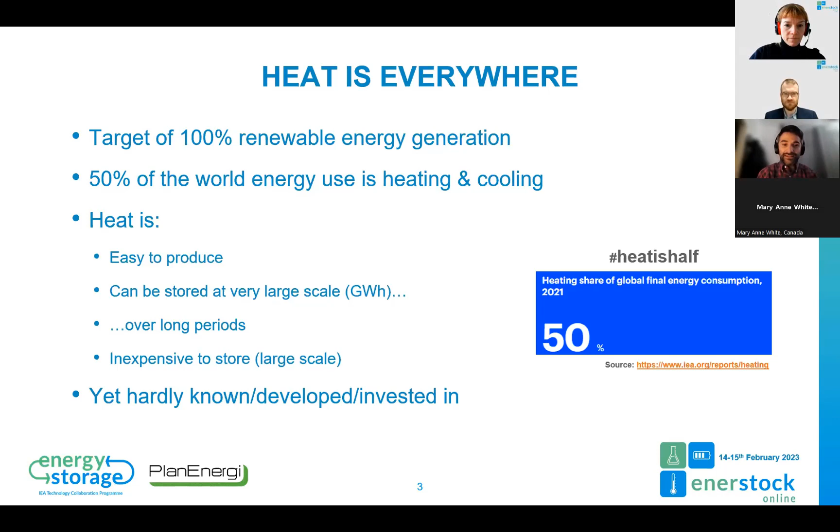Heat is also easy to produce. It can be stored at very large scale, so we're talking about gigawatt hours over long periods. Seasonal storage is something that actually works, and it's quite inexpensive at large scale. And yet it's hardly known, developed, or invested in.

So to give more arguments, I'm saying that heat is inexpensive to store, but how inexpensive? Well, it's from €4 per kilowatt hour to less than €1 per kilowatt hour at large scale. If we compare this with pumped hydro storage, it's between 100 and €200 per kilowatt hour in good cases, and on average 175.

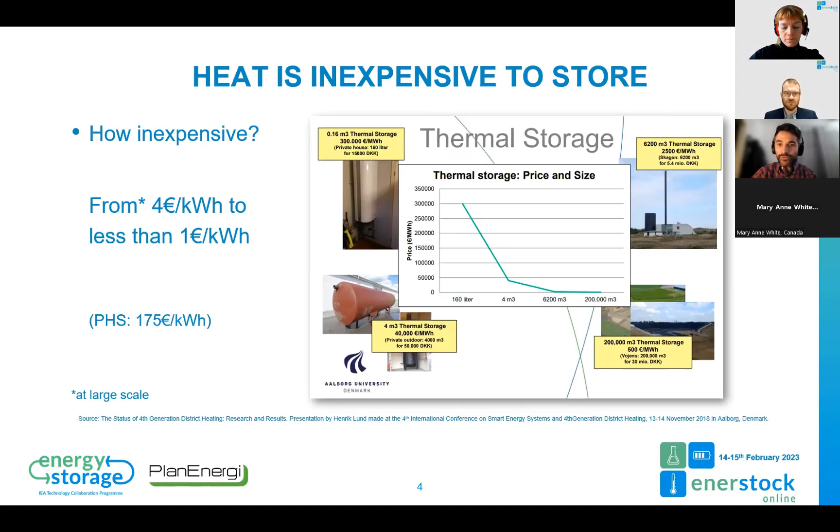So you can see the difference in investment costs here, and the bigger the better. As you can see on this curve, when you have household thermal energy storage, it's quite expensive in specific price. But then when you go up to a very large scale, it's very inexpensive.

Now, thermal storage enables renewables. It provides more flexibility in district heating systems. It helps reaching a higher share of renewables such as solar.

So on the right-hand side here, I'm not sure if you can see my cursor... No, I cannot see. But anyway, on the right-hand side, you can see that we can store heat in the summer where there is low heat demand, and then reuse this later on during the year.

It can be used also for peak shaving, power to heat, such as sector coupling, and a large variation of operational conditions. So it can be used for short-term, long-term, and middle to large district heating systems.

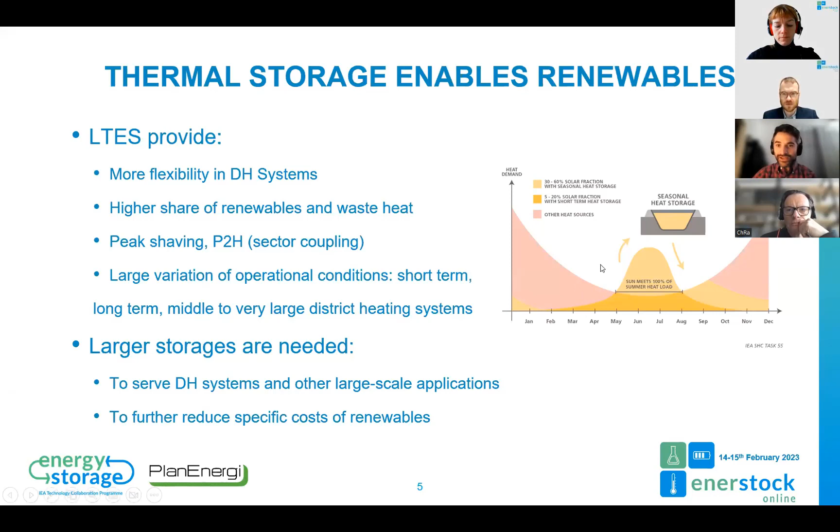Now, larger storages are needed to serve district heating systems and other large-scale applications, but also to reduce the specific costs of renewables. If you want to reach higher targets of renewables, then having a storage is indispensable.

Now, why is thermal storage less known? I'm giving a lot of advantages here, but it's less invested in, it's less a hot topic. Well, first of all, it's often coupled to district heating or big infrastructure, so the public is not really aware of it. It's more industrials and big district heating networks that have to use thermal storage.

It's a local solution. So unlike electricity storage, it doesn't go through borders. It usually is at city level. There are less use cases. The cheap fossil fuels have made it possible to implement district heating systems without having the need for storage, because energy production was cheap.

But today we can see that this is no longer the case. And the last point is that it's less high-tech, so it's less of a hot topic. It's maybe less sexy, but I think we'll have to disagree on this one. This is a tank thermal energy storage, and I think it's very sexy.

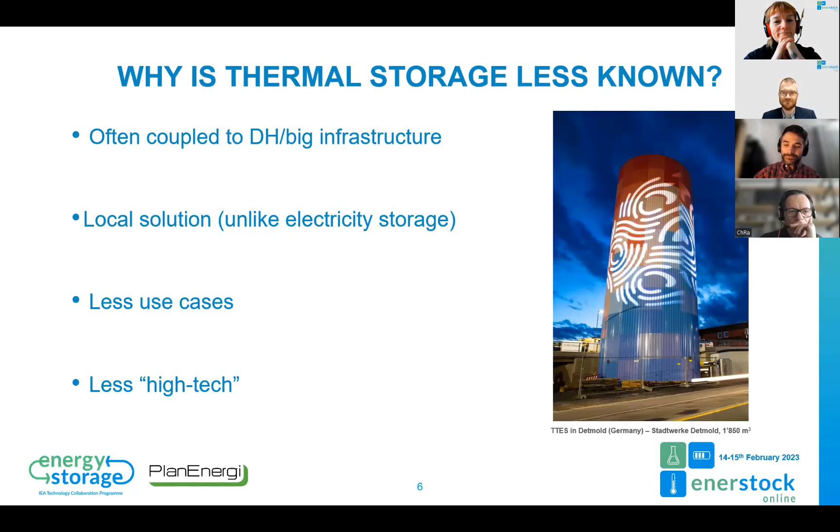Now, the focus, when I say large thermal energy storages, in this task, is on 4 different technologies: tank thermal energy storages, pit thermal energy storages, boreholes, and aquifer thermal energy storages. They can be above ground for the tanks, but also underground. And the heat transfer medium is water or soil.

The volumes are more than 10,000 cubic meters. And the applications are variable. It can be daily, weekly, or seasonal storage for district heating and industries.

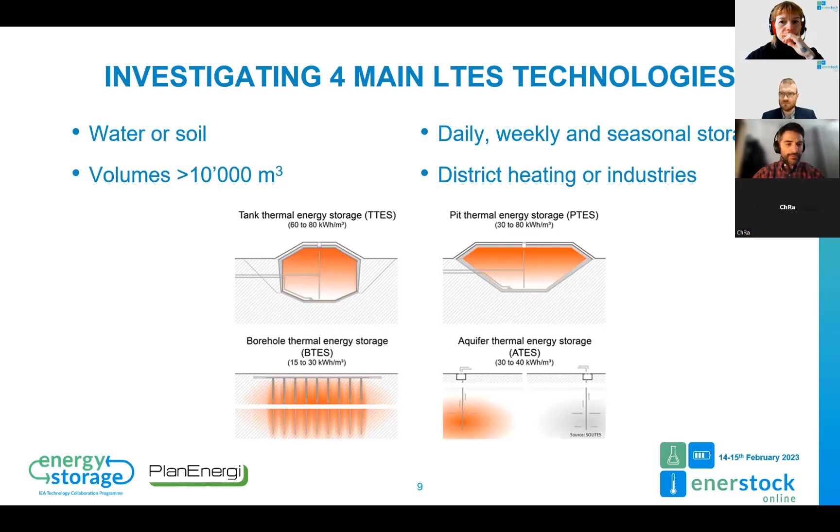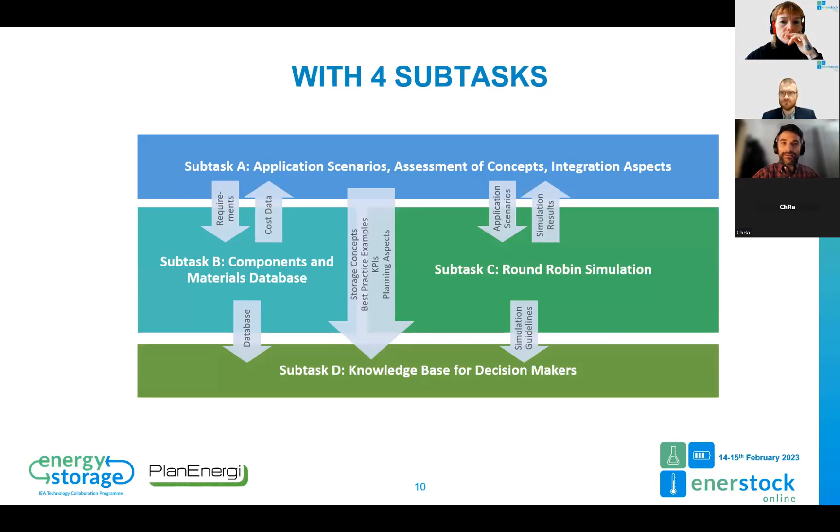Within IEA Task 39, we have 4 subtasks, and it's almost perfectly alphabetic. Subtask A is for application scenarios and concepts. In this subtask, we make a list of projects, list of KPIs, use cases, typical implementation procedure, and techno-economic analysis.

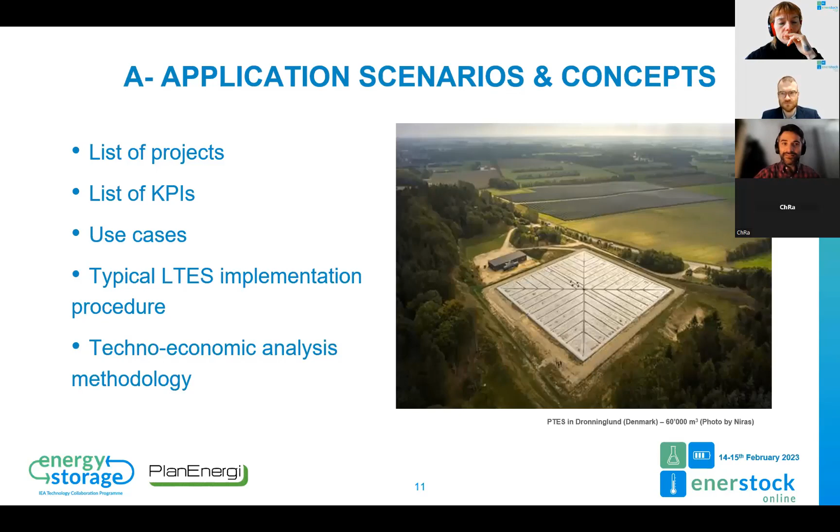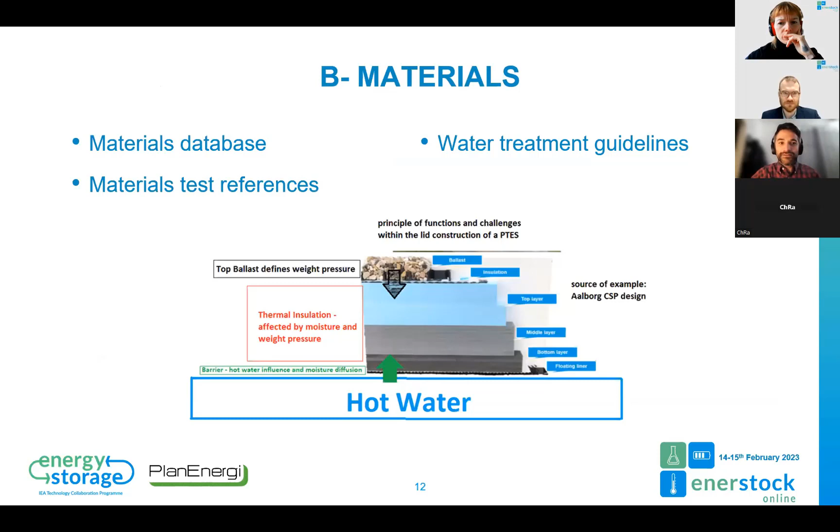Subtask B, that's where the alphabetic sense goes a bit off. It's for materials database, test references, and also water treatment guidelines.

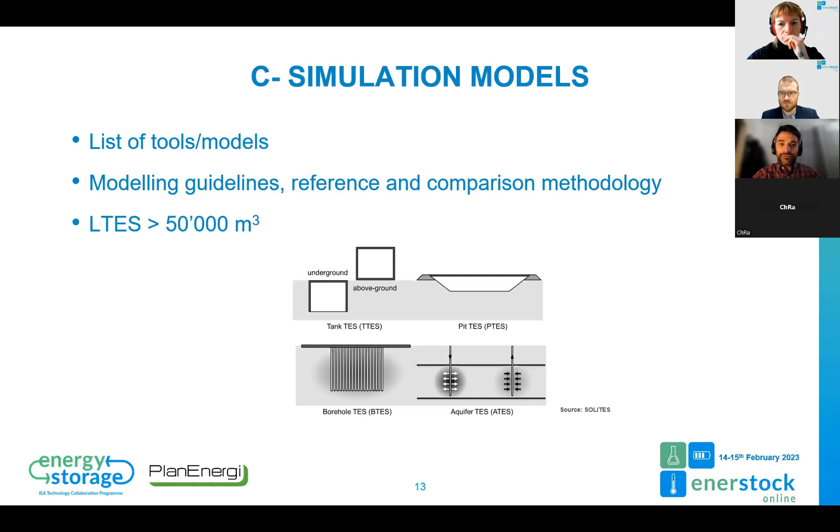Now, C is for simulation models. It's a list of tools and models that will come out of this. It's modeling guidelines and reference as an outcome for this task, and it's for large thermal energy storages for more than 50,000 cubic meters.

As I mentioned earlier, I'm responsible for subtask D, and our idea is to develop tools, references, and methods to guide large thermal energy storage project stakeholders through the process of implementation. In implementation, there are 4 essential phases where we have identified 3 target groups.

The first target group is policymakers. The second target group is researchers and engineers. And the last target group is project developers.

And a typical large thermal energy storage project takes place in 4 phases. The first one is the opportunity phase, and we'll have deliverables for that phase, which is project examples, business cases, and a list of KPIs.

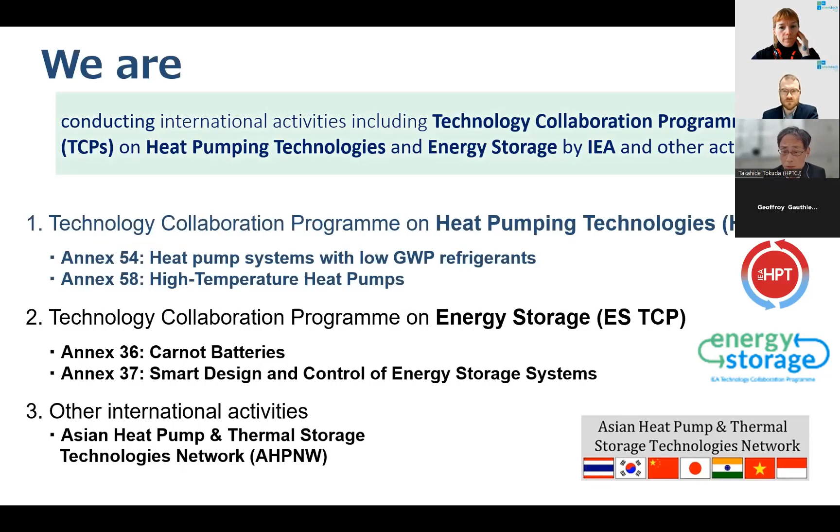Now I would like to present the country report of Japan. This is what my predecessor, Mr. Takayoshi Shuto, presented at the 93rd Executive Committee meeting, XC93, in Rome last May. First, this is about overview.

Geographically, Japan is an island nation consisting of 6,852 islands of various sizes. The total area is about 378,000 square kilometers, which is close to Germany. But most of the land is mountainous. There are 108 volcanoes, and 7% of the world's active volcanoes are in Japan.

The population is 125 million, but it is gradually reducing due to declining birth rate. Since the land area is long from north to south, the climate varies from subarctic to subtropical. In many areas, summers are hot and humid. Winters are snowy in northern and mountain areas.

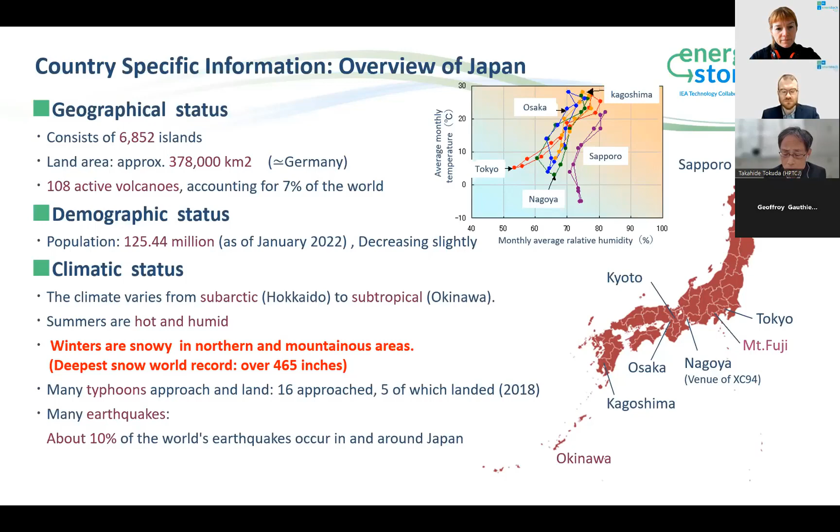The Guinness World Record for deepest snow is also recorded at Mount Ibuki, Japan. As natural disasters, many large typhoons have landed in recent years. There are many earthquakes, and it is said that about 10% of the world's earthquakes occur in and around Japan.

This is energy status. The left figure shows the primary energy supply trends in Japan. Although the share of oil is decreasing, Japan still relies on fossil fuels for more than 80% of its energy needs. Renewable energy accounts for approximately 10%, with solar and hydropower making up the majority. The percentage of nuclear power has remained low since 2011.

The right figure is the percentage of final energy consumption by sector. The industrial sector still accounts for a large share, but its growth is being controlled by strict regulations and efforts of energy conservation.

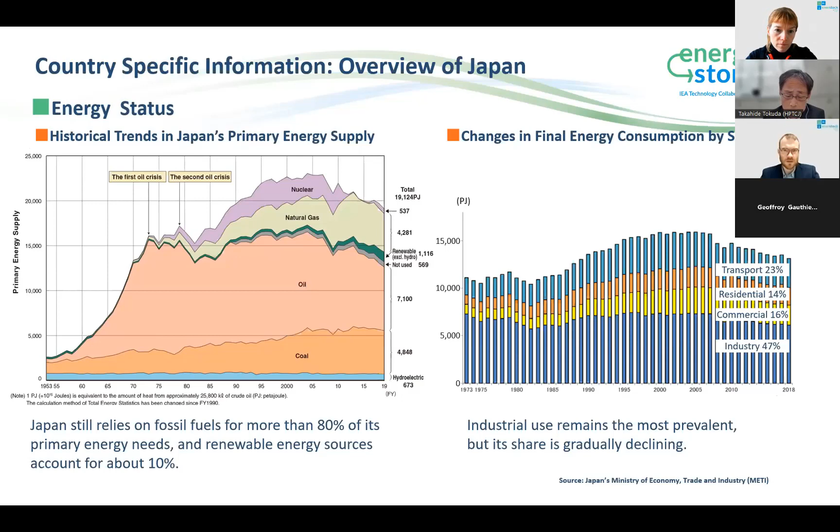Japan has declared its goal to reduce overall greenhouse gas emissions to zero by 2050, to achieve a carbon-neutral, decarbonized society. The left figure shows a scenario for Japan's 2050 carbon neutrality. By 2030, we aim to reduce greenhouse gas emissions by 46% compared to 2013.

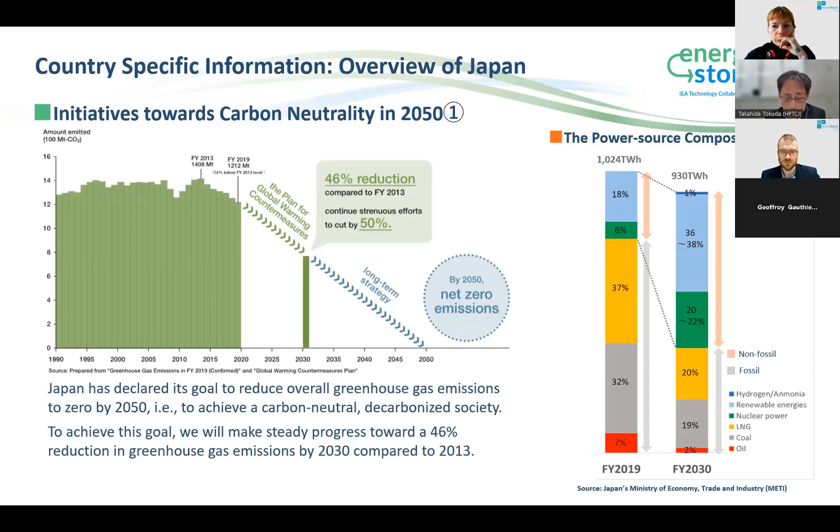The power generation ratio in 2030 is as shown in the right figure. The goal is to cover about 60% of the total with non-fossil fuels.

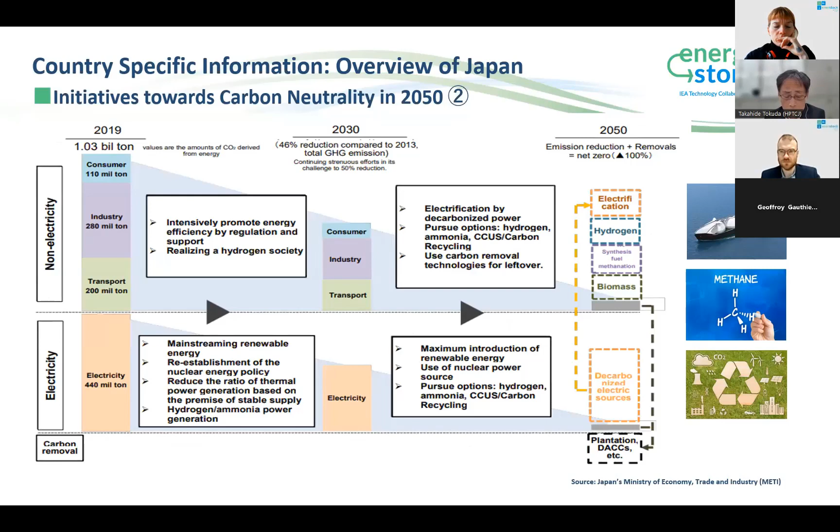This figure describes initiatives towards carbon neutrality in 2050. Further electrification and technological innovations such as hydrogen utilization, synthetic fuels, and carbon recycling are needed to achieve carbon neutrality.

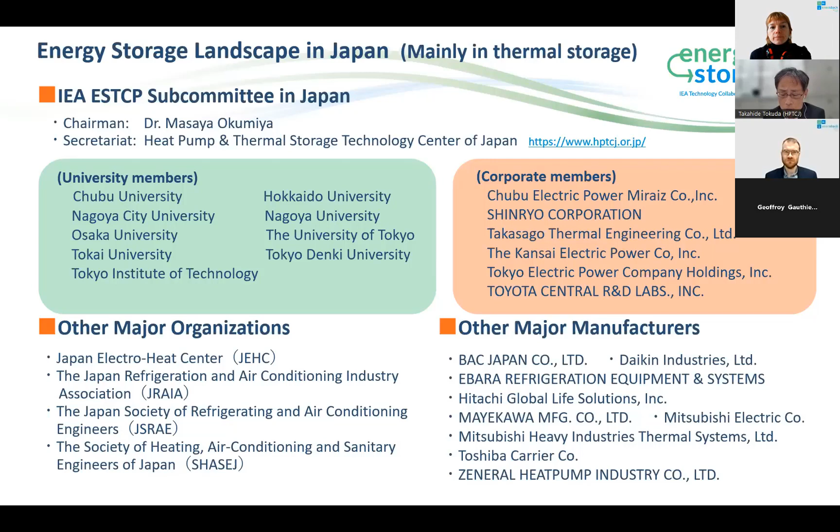This is the landscape of energy storage research, mainly in thermal storage in Japan. We organize the IEA ESTCP subcommittee to link ESTCP activities with domestic researchers and companies. Many universities and companies are participating in the subcommittee. Other major research organizations and manufacturers are as shown.

I introduce major subsidies and incentives for energy storage promotion in Japan. Subsidies are available for entire systems containing energy storage, such as ZEB and demand response. In addition, many other subsidies are set up by the government and local governments. Incentives have traditionally been set in electricity rates and the Building Standards Act.

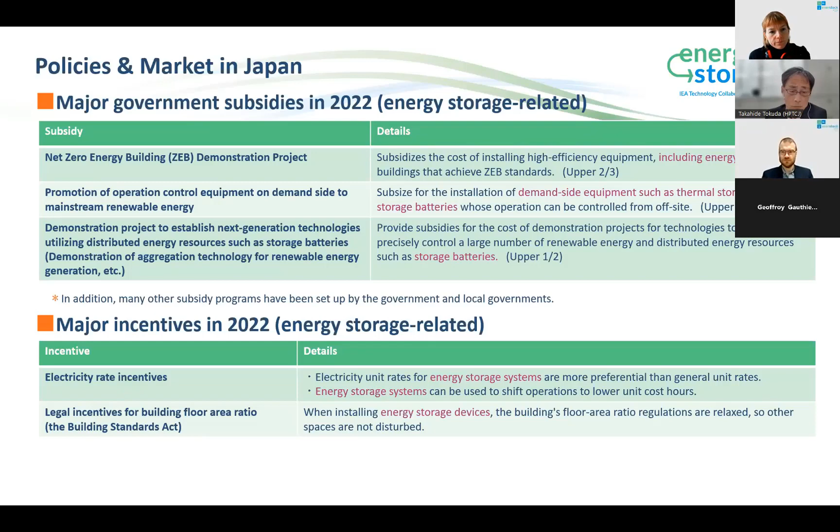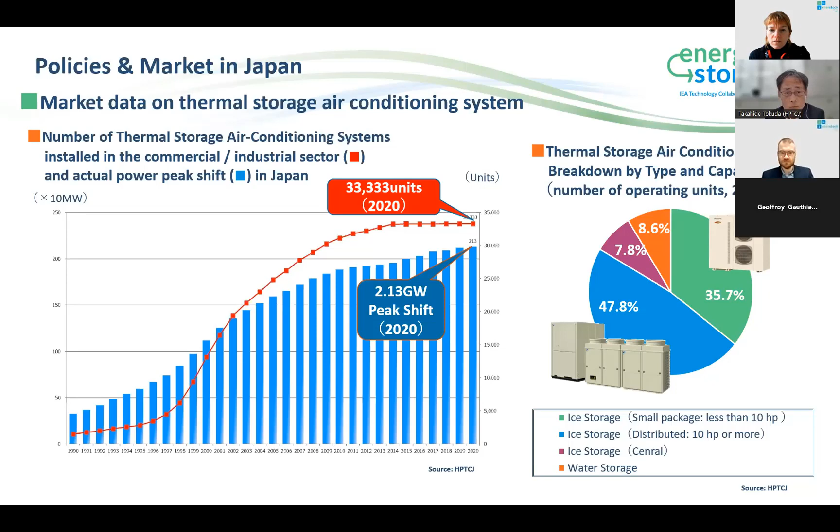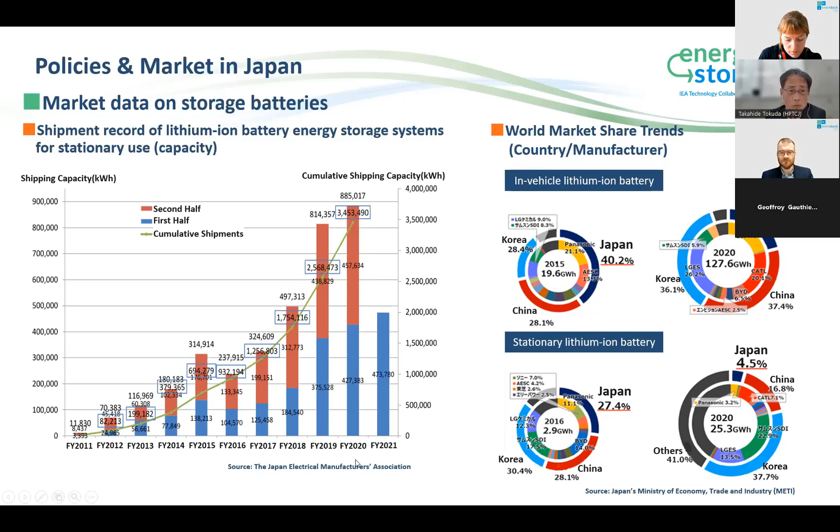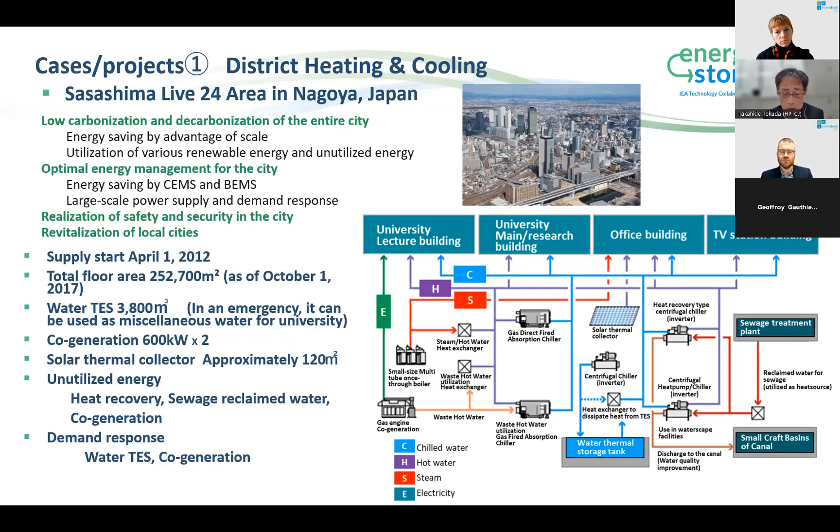As heat sources, recovered waste heat, sewage heat, and waste heat from cogeneration are used. It also provides demand response through the thermal storage tank and cogeneration. The water in the thermal storage tank can also be used as emergency water in the event of a disaster, enhancing its disaster prevention function.

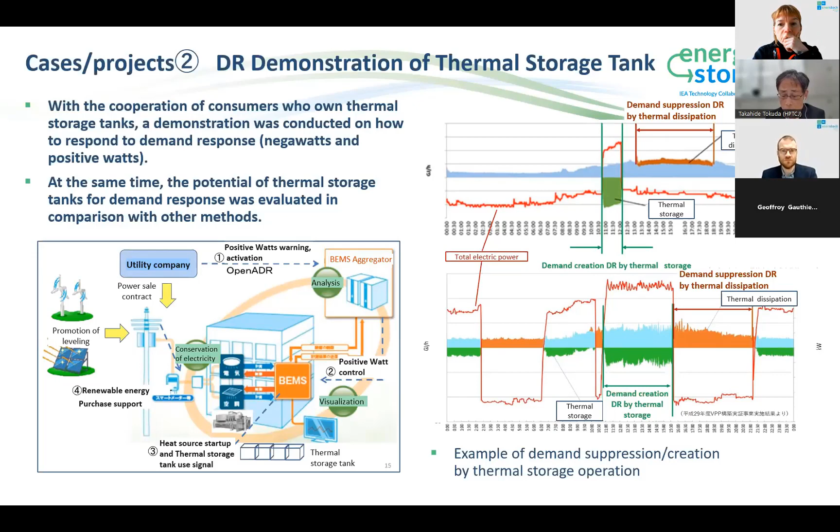The second case is the demonstration test of demand response using existing thermal storage tanks for air conditioning. With the cooperation of the existing thermal storage system owners, responding to demand response was demonstrated. At the same time, we evaluated the potential of thermal storage tanks in comparison with other methods.

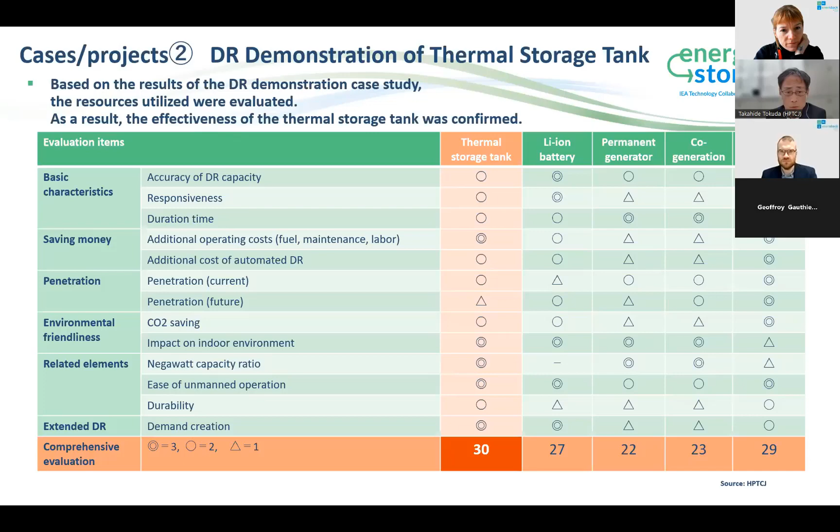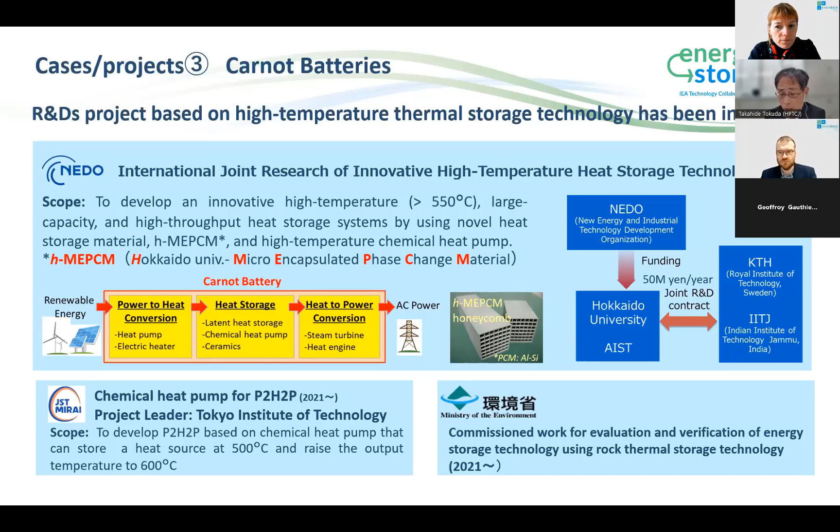In addition, the Ministry of the Environment has started a large-scale research project on rock thermal storage. We understand that these are the results of Task 36 activities. In addition to the Sasashima Live 24 I introduced earlier, I will introduce 4 examples of thermal storage in Japan.

Nakanoshima is the business and cultural center of Osaka, and this area is also powered by district heating and cooling, and is equipped with a 2,400 cubic meter water thermal storage tank for cooling and heating.

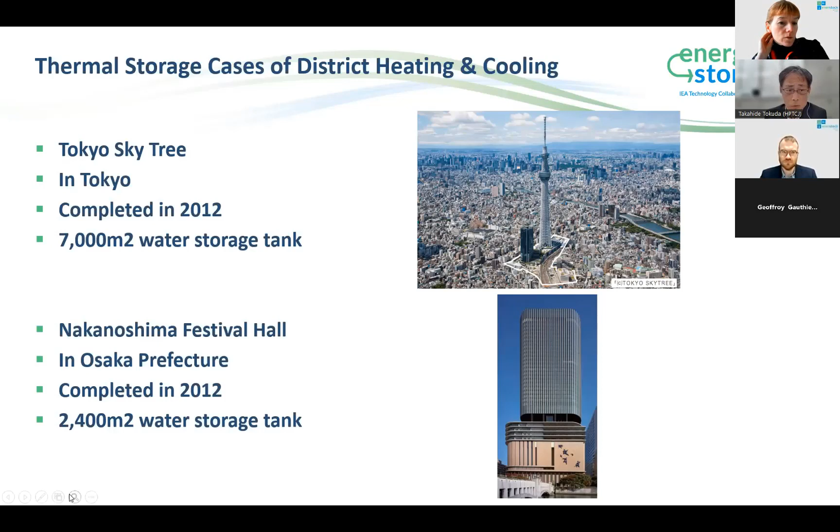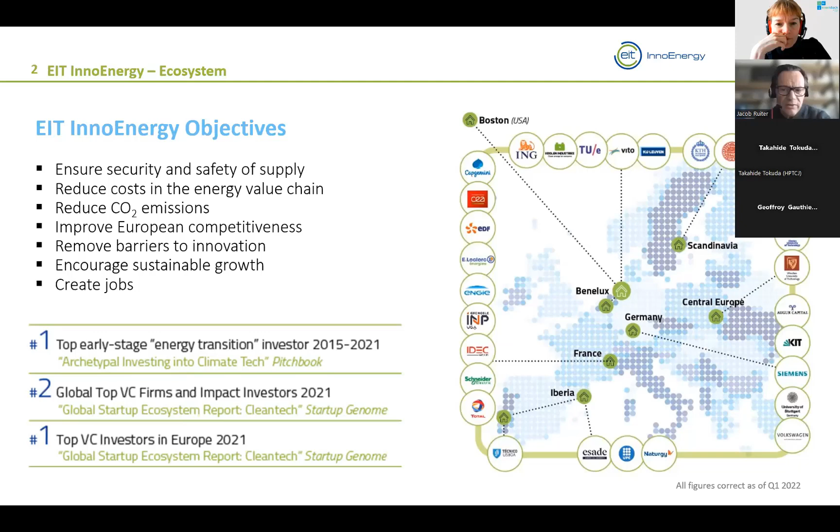So the core of our activities is that we de-risk and reduce time to market for energy innovations. Since our existence, we have scrutinized about 7,000 innovative cases in sustainable energy. We've supported around 450, and today we have around 300 active investments left, meaning about 150 went belly up.

Recognized by many externals as the most active sustainable energy investor, we're one of the largest climate and renewable energy tech investors in the world.

We're scattered around 6 offices. We have a very strong presence in Brussels because of our interests there, but also so we can have influence on regulation and know what's going on. And 2 years ago, we also started an office in Boston.

Our activities include 4 things. Number 1 is that we invest in human capital. So with our partner universities, we offer master classes. We produce master students basically, and we offer professional learning services.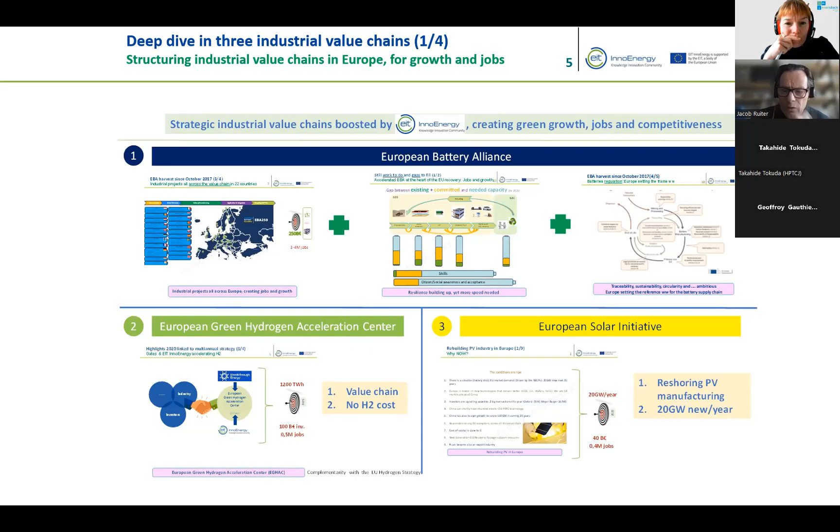For that, we got political support, but I'll show you a picture later on. The second one we did was the Green Hydrogen Acceleration Center, and the last one was the Solar Initiative. But let me first explain again our first one.

So there, we saw the opportunity to build business for European companies to grow, and for the possibility for Europe to become less dependent on other manufacturers.

So we cover the whole value chain, starting at raw materials, and there we have supported, for instance, lithium mines, but also the mining of carbon. And it covers the whole value chain up to and including the recycling, which is important because with mining alone, you will still need to recycle the materials used in earlier batteries to make sure you'll be able to have a European-only economy around batteries for electric vehicles.

And the business is substantial, so it's around 250 billion a year. At least that is what we thought about 4 years ago when we started this.

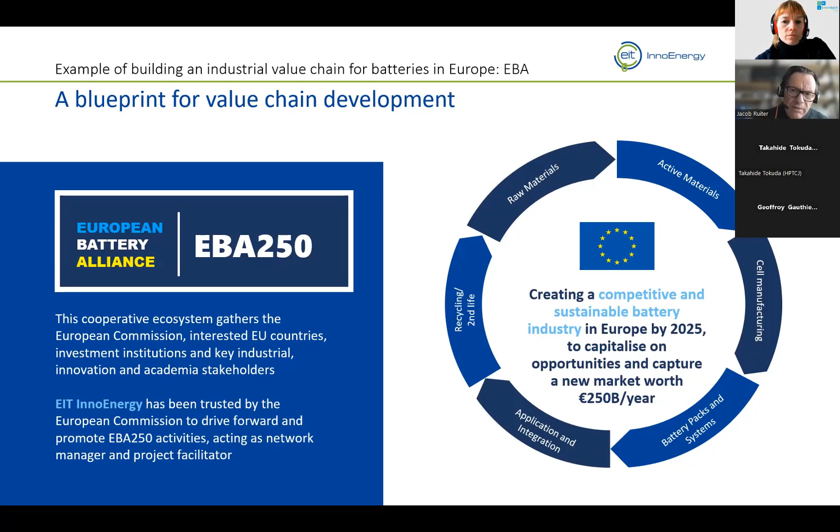Today, I think we are around 100 billion, and in the time after we launched the European Battery Alliance, we saw that in Europe we had already invested more in the battery value chain than China in the same period. So as I said, we got political support, which is important because manufacturers will see that there's an active framework, but also funding for industrialization around it. It was actually Maros Šefčovič, this gentleman here, that was one of the first big supporters of this initiative, but later on von der Leyen adopted the whole idea, and we got public open support for the Battery Alliance.

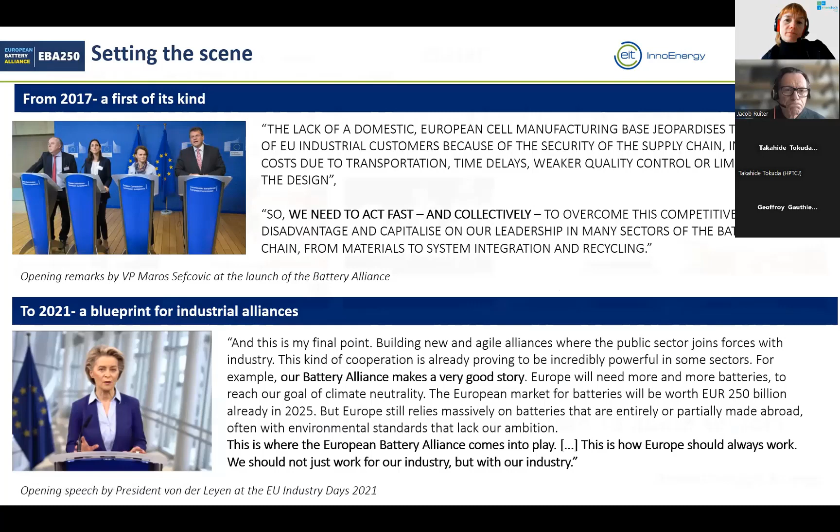Then the second one is the European Green Hydrogen Acceleration Center, an initiative we decided to start without the political support of the European Commission. That's because the Commission already had the Clean Hydrogen Alliance set up, and we decided for strategic reasons to only look for green hydrogen.

What we did there is we built newcos - whole new companies with strategic investors across a specific value chain. The first one we set up, the name is GravitHy, built around steel. We're also one of the first investors in H2 Green Steel in Sweden, and we're about to announce a newco around green fertilizer somewhere located in Europe.

We very much believe in the hydrogen economy, but we don't believe in the discussions around the price of green hydrogen. What we believe is as soon as there's a customer willing to pay a premium for a product where green hydrogen has been used to decarbonize it, that is a market. We also saw, by the way, that it was actually the incumbents around the oil and gas industry that were leading the discussion about the price of green hydrogen, so it was not a completely fair discussion.

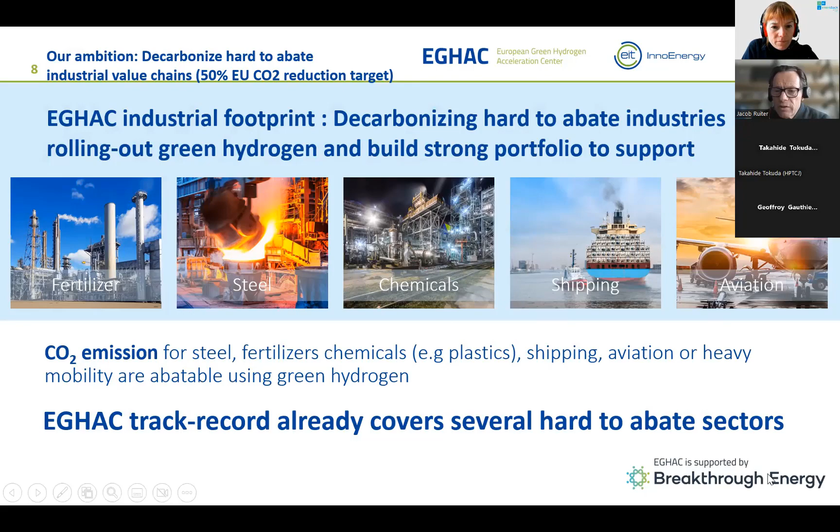Then the last one, but certainly not the last one we're going to set up - we're in talks about setting up the fourth one with the Commission that we will announce this year. But last year we set up another industrial value chain. Again, remember, why are we doing this? We're doing this because we see opportunities for Europe to become more competitive.

In this case, for the value chain of solar panels, it is a massive growing market - also because of the rising gas prices, everybody wants to install solar power now. So we started first the European Solar Initiative, which has now been revamped to the European Solar PV Industry Alliance, where just like with the European Battery Alliance, we want to reshore the whole value chain.

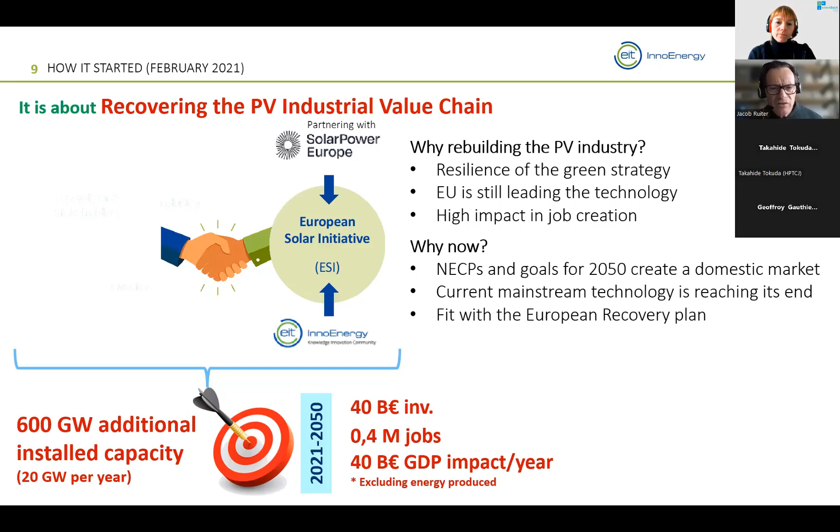That is from the ingot casting that will then form the input for the wafering, up to and including the manufacturing and also recycling of solar panels in Europe. There's a massive market also there, quite a lot of business opportunities.

So here's another slide on the size of the market. I think the audience here knows very well what Biden announced last year on the Inflation Reduction Act. It took some time from our perspective to see that Europe took this as an extremely serious threat.

To give you an example, if Northvolt would relocate their existing plant from Sweden to somewhere in the United States, it would benefit 1.7 billion euro on their bottom line P&L. Why? Because not only is the capex investment subsidized, but also the operational expenditure, the OPEX, is subsidized. So it's massive - try to convince Northvolt to stay here. So we're happy to see the measures that are being taken right now.

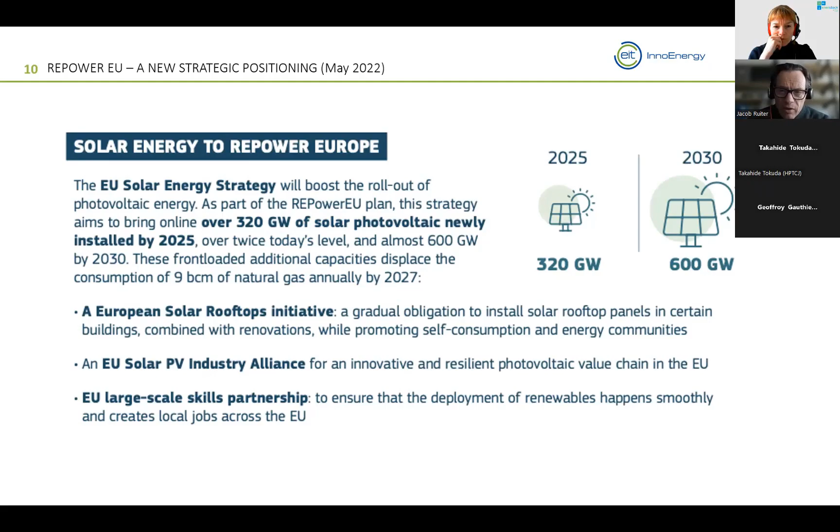And this is obviously also very beneficial to all the strategic value chains and the industrial parties that are part of this. This is Mr. Breton, who announced last year the importance of reskilling and also reshoring the manufacture of solar panels into Europe. So, like the EBA, this is politically supported by the Commission.

And that's where I conclude my presentation. I'm happy to answer any questions that you might have.

Okay, great. Thank you. My name is Katharina Gapp-Schmeling. I work as a researcher at IZES, Institute of Future Energies, but I'm also a professor at Victoria University in Berlin, and I will talk about the sustainability assessment of municipal heat transformation concepts, which we developed in our project KoWa.

KoWa means municipal heat transformation and is a funded project by the Federal Ministry of Economic Affairs and Climate Action. We started in 2020, and actually began our field studies in April 2020. You can imagine the start was a little delayed because in April 2020 you couldn't talk to anyone in the field since we were in a lockdown.

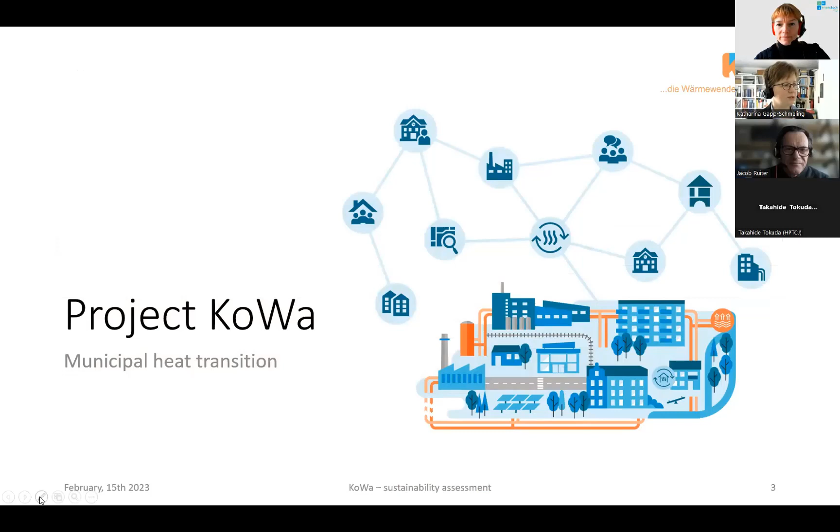So our project KoWa Municipal Heat Transformation started in 2020, and we wanted to know about participants and challenges in typical municipal situations for the heat transformation. We analyzed local supply heat systems and wanted an evaluation and assessment of technological, economic, legal, and social requirements. Since at least 5 of us have been members of the Network for Sustainable Economics for quite a decade now, we decided to do a sustainability assessment to answer those requirements and figure out how we can evaluate that.

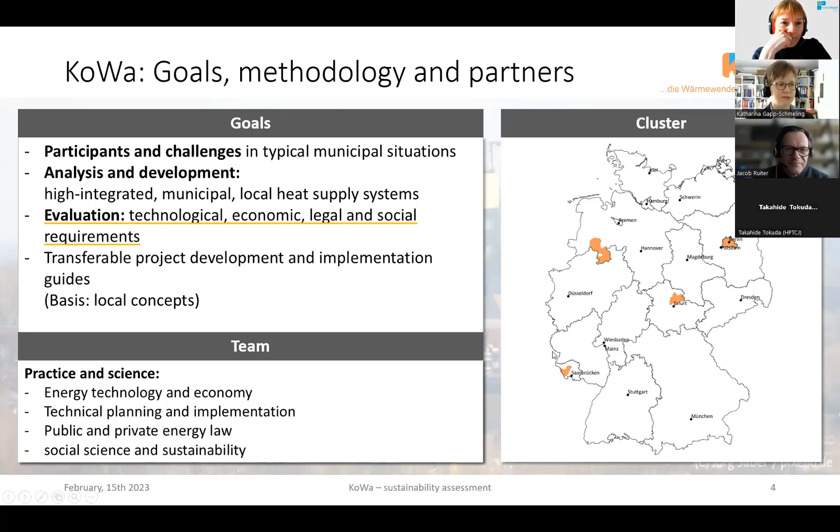So what you see here are our study areas, which I also put on an additional slide. We combined our study areas into 3 clusters. First, the industry cluster, which has 2 study areas, where the criteria is that industrial waste heat is used for the municipal heat supply.

Then we have the city or urban cluster, with urban buildings and infrastructure. Those are 2 study areas in Berlin, one in the east and one in the west. And we have the so-called existing infrastructure cluster, which also includes 2 study areas: one in Erfurt, in the middle of Germany, in the heart of Germany, and one in Saarland, in Saarlouis.

The criteria for the existing infrastructure cluster is that you have a small town building structure and a quite old existing heating grid network. So we have to deal with how to make that fit for the future, fit for 55, how to change that.

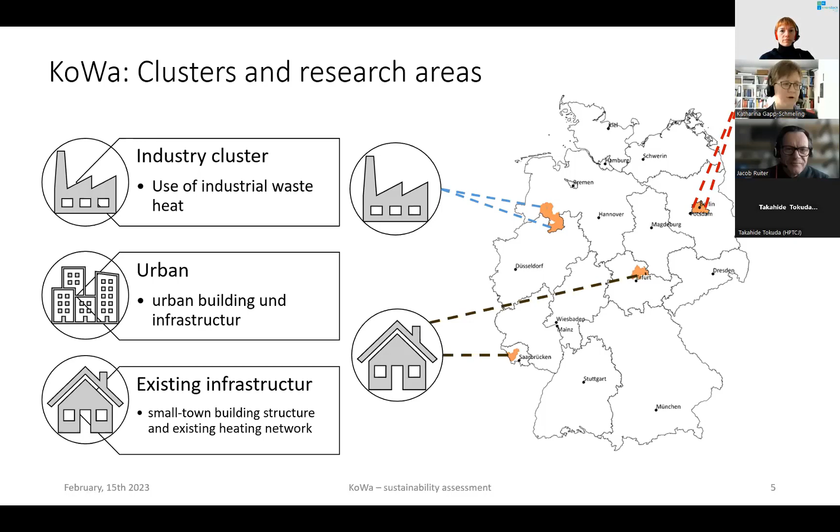In order to reach climate neutrality, we do not want to only reach a carbon neutral heat supply system. We want to look at all three dimensions of sustainability, because from our point of view, sustainability always tries to reach sufficient standards in all three dimensions—ecological, economic, and social—in order to stay within the natural boundaries of our planet.

So what we did to come up with a sustainability assessment was combine different criteria. I will show you how those criteria worked for one example: our ideal typical heat supply solutions for KoWa City. This is just a fictitious example to explain the methodology.

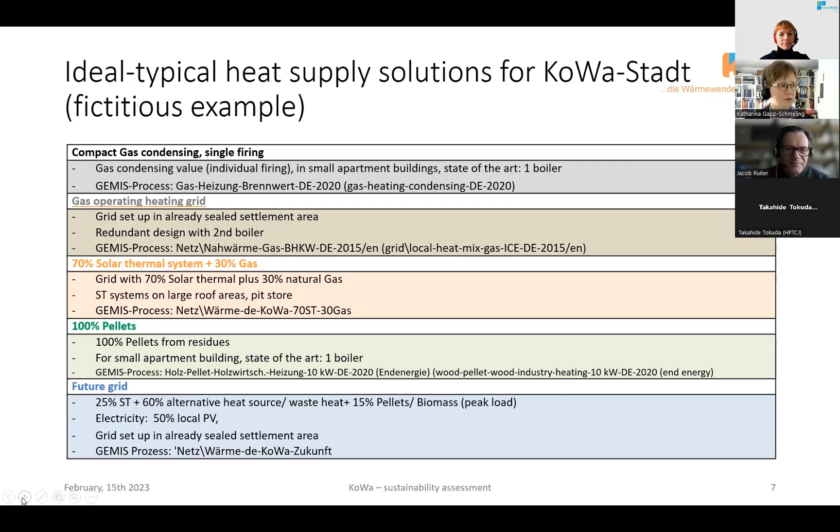In our fictitious example, we have a natural gas operating heating grid—this is what you see here on top. The other concept includes 70% solar thermal systems and 30% natural gas; 100% pellets; and what we called a future grid: 25% solar thermal power systems, 60% alternative heat source or waste heat, and 15% pellets or biomass as peak load.

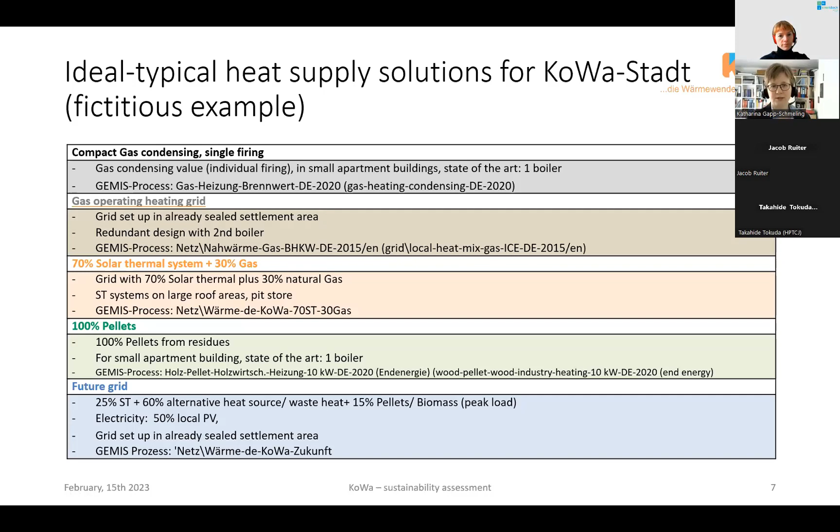What you might already recognize is that for each of the concepts, I've given the GEMIS process. GEMIS is a software tool where you can calculate carbon emissions and other ecological footprints, which we used as a proxy to evaluate and assess our concepts.

But how did we start, or how did we come to our sustainability assessment? How did we choose the criteria? As I already mentioned, some of us have been members of the Network for Sustainable Economics for more than a decade now, and that Network works with a target system of a sustainable economy.

The target system differs slightly from the Sustainable Development Goals. The reason is that they invented their target system in 2009, so well before the Sustainable Development Goals. From the perspective of the Network members, some indicators are missing in the SDGs—for example, the indicator on price stability, which we don't have in the SDG indicators.

So we took this target system and combined it with the Sustainable Development Goals. You probably all know that in 2015, all member states of the United Nations agreed on 17 global goals, which should be reached by 2030.

So we took the goals from Sustainable Economics, linked them to the SDGs, and derived quality goals that we need for the heat transition, operationalizing them into criteria and indicators. You will see in a minute how that worked and how we used the indicators to evaluate and assess whether our concepts might improve the situation in a sustainable way.

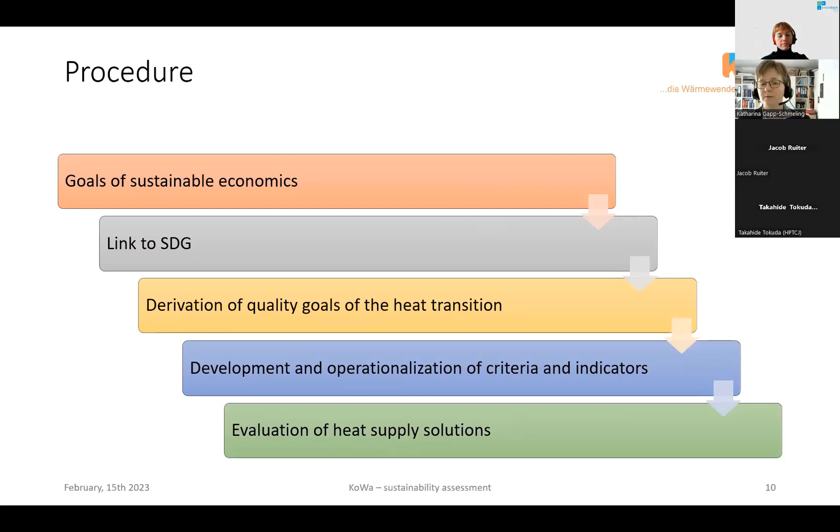It is good that we linked it to the SDGs, because most companies that produce energy or supply heat systems, or even municipal companies, will have to report their sustainability indicators starting 2024 at least. You've probably heard about the Corporate Sustainability Reporting Directive, CSRD. It's a new directive by the European Union, and all companies with more than 250 employees have to report on sustainability indicators starting next year. So if you include a sustainability assessment for the projects you're planning, you already know which indicators will improve over the years as you implement the project.

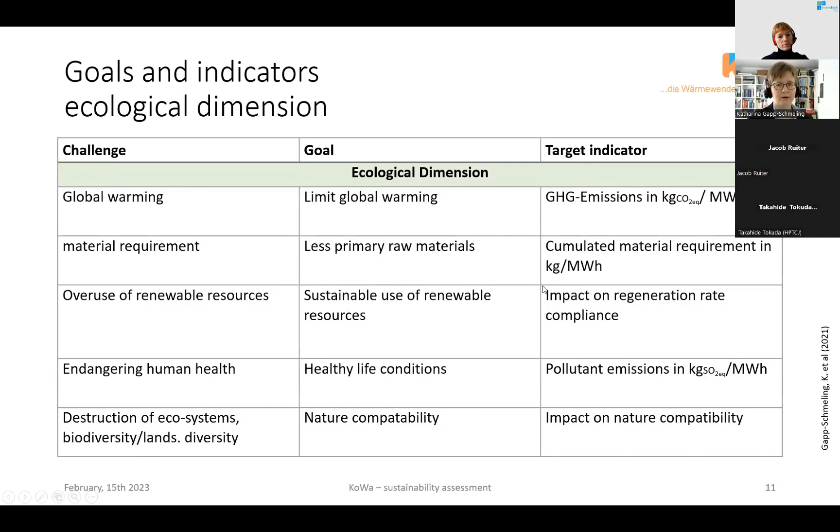So we had 5 ecological indicators, and I will only explain global warming. Of course, we want to limit global warming, so our target indicator is greenhouse gas emissions in kilograms of carbon dioxide equivalent per megawatt hour. For the economic dimension, for example, the challenge is a lack of sustainable products, so what we need is uninterrupted security of supply. You don't want to freeze during winter, so we need redundancy.

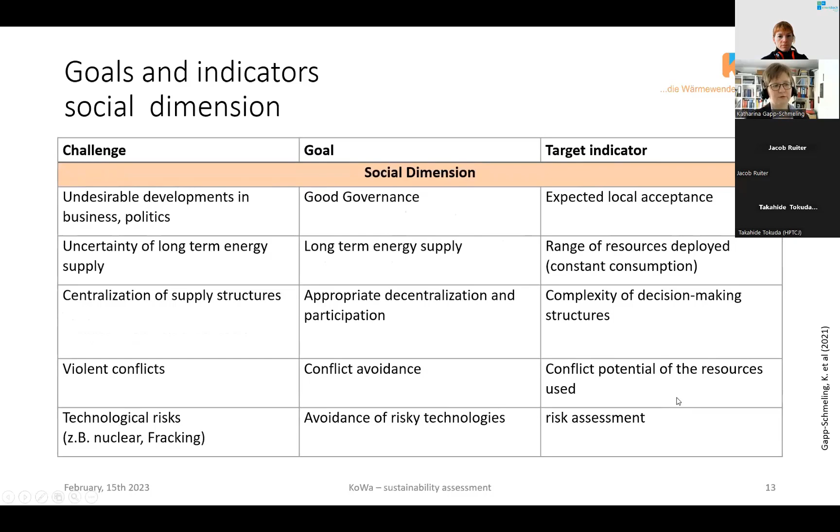And for example, in the social dimension, we also have 5 goals and 5 indicators, and one indicator is the conflict potential of the resource used.

So what we want our stakeholders in the projects to do is make an informed decision, to know the strengths and weaknesses of sustainability across the indicators for the concept they've chosen to implement.

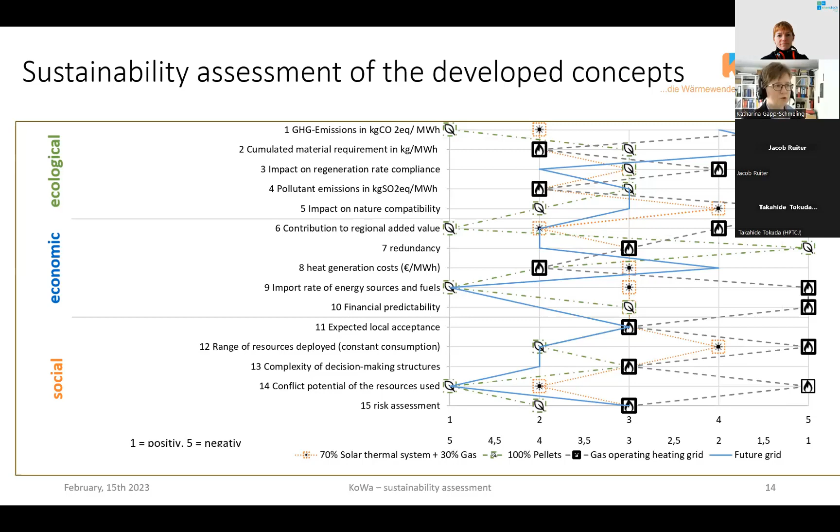I will give you some focal points on 3 indicators. The first one is the assessment of greenhouse gas emissions.

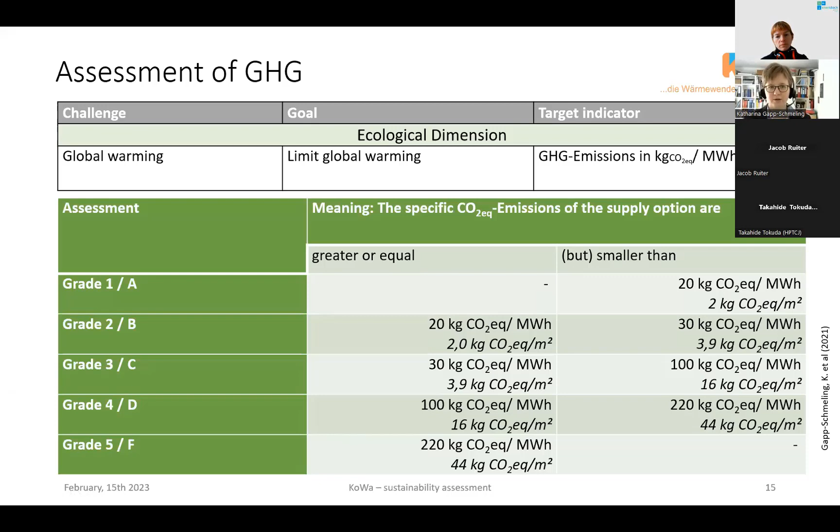What we calculated were the greenhouse gas emissions using the GEMIS software, and here you see our rating grades. Grade 1, an A, is if you have less than 20 kilograms of carbon dioxide within the whole supply chain - so it's not only direct emissions, it's also indirect emissions. What we can see from our concepts in the first step is that 100% pellets gets rating 1, since if you burn the wood, it's only direct emissions, but before that there were emissions combined in producing the wood.

The future grid has a quite bad rating with the current German electricity mix. It will have a rating in stage 1 if we have a fully renewable electricity mix. This is because for the future grid, we use a heat pump and electricity.

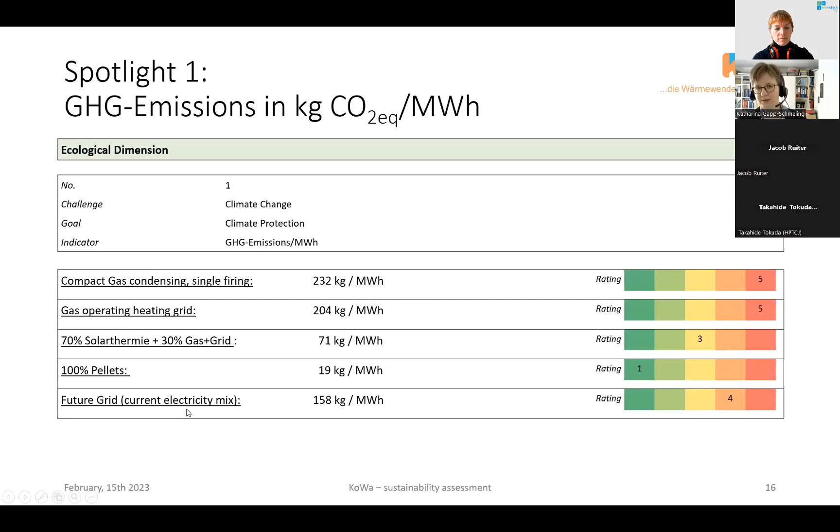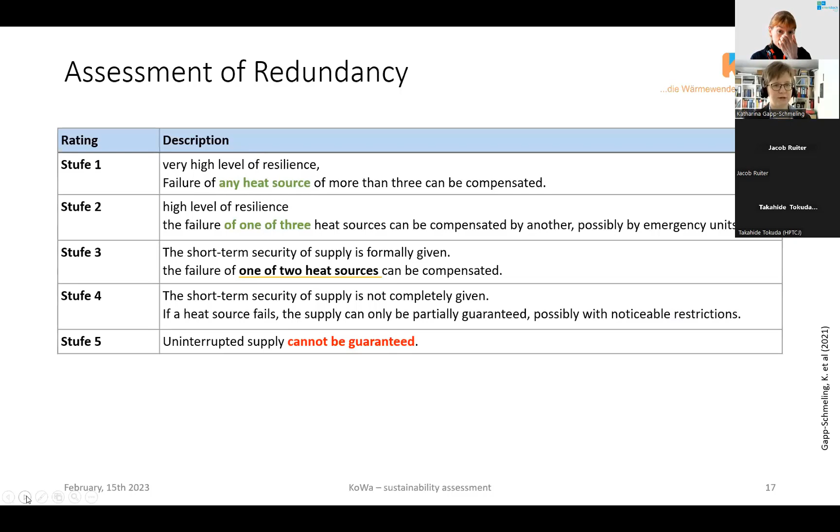For redundancy, it's important that you have more than one heat source. So if you have, for example, 150 apartments to heat, and one of your boilers just fails, the apartments will get cold, so you need more than one to ensure redundancy - or for example, if you don't have gas supply anymore. What you can see here is that the pellet concept is quite bad because we only have one boiler.

However, for the future grid, it's quite good because we have another heat source - we have a heat pump, we have solar thermal power systems, and we might also have an additional boiler. So the risk that you have to freeze is quite low.

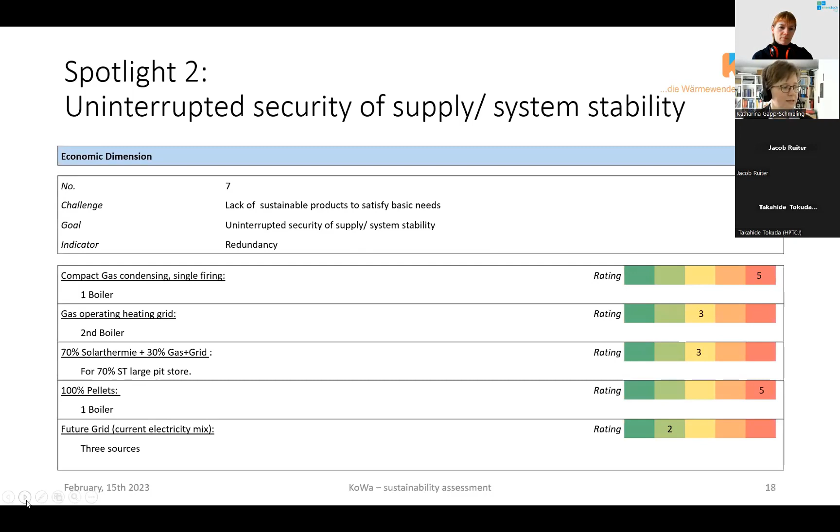Last but not least, let's have a spotlight on the conflict potential for the resources used. What we calculated was the 3-country concentration of imports. So in 2020, more than 90% of the German imports of natural gas came from 3 countries only. So this is the concentration.

Of course, we know that changed now. And what we also did, we calculated the weighted 3-country conflict risk. There are world governance indicators by the World Bank, which tell you about the conflict risk of certain countries. We looked that up for those 3 countries, weighted it with the import quota, and calculated for it. So what you see with natural gas, these are the numbers in 2020.

We did that in 2021, so before the war started. And when I first presented that slide in December 2021, someone asked me if I'm really sure I want to rate natural gas that bad. And I was really sure, because what you could see is that for natural gas, we had a high conflict risk. You could already see that in the numbers.

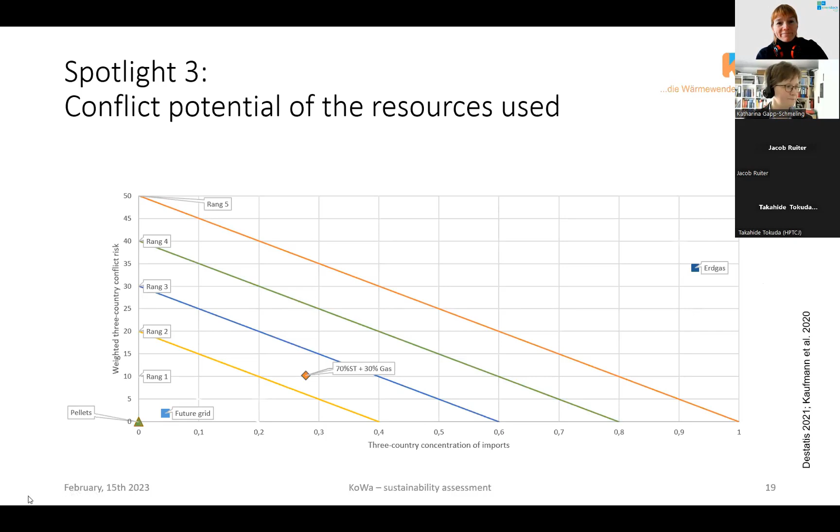Of course, I know today no one is surprised by that chart. So for gas, we have a rating of 5. And of course, for local sources, we have a better rating.

I will very briefly, because I guess I'm running out of time, just show you some of the study areas, just in 2 minutes. Is that okay? Absolutely, Kay. We have some buffer at the end, so don't worry about it. Yes, okay, okay.

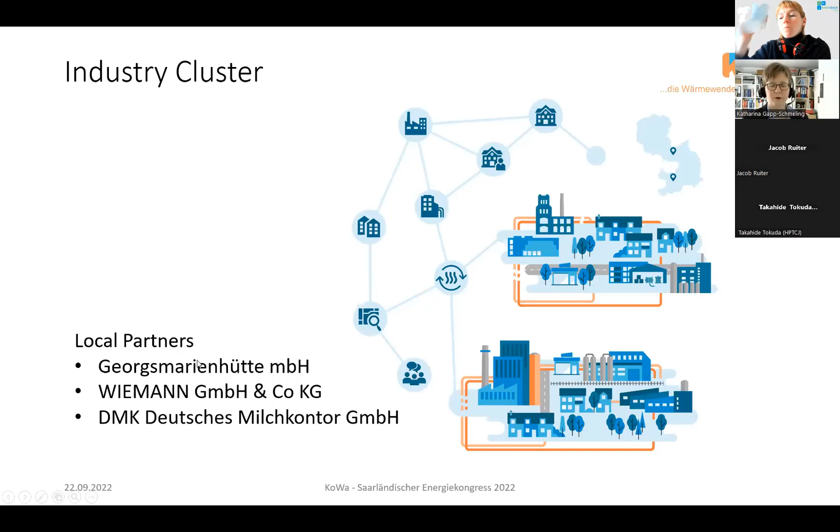So I brought for you the industry cluster. In the industry cluster, we have local partners who are producing certain products. For example, Georgsmarienhütte produces steel, and DMK, Deutsches Milchkontor, produces cheese. And to produce cheese, they need heat. And when they melt their steel, they still have some waste heat. So what we had a look at is how to transport that heat.

So we had industrial waste heat, also waste from residual wood from Wiemann, because they're producing desks and furniture, and a biomass heating plant. We did 2 concepts with high temperature and low temperature, and we used a heat storage there. So the industrial waste heat goes to the heat storage, and then it goes to DMK to produce cheese, to be used as process heat.

In the scenario with low temperature, you might need an additional natural gas boiler to come to the high temperature again. You might ask yourself, okay, well, then just stay with high temperature, but we have 2 kilometers to cross between the steel factory and the milk factory. And so for the local municipal heat grid company, it is difficult to build a high temperature grid. That's why we calculated both.

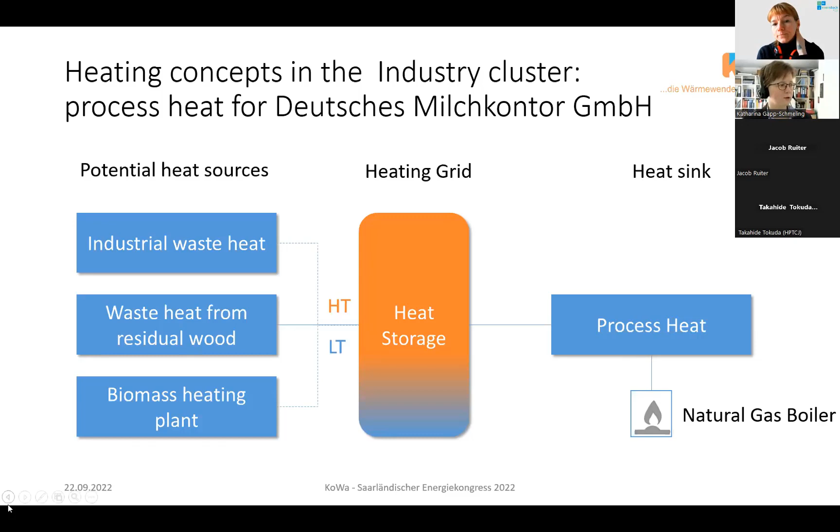And what you can see is that actually, if we look at the sustainability assessment, the high temperature concept is even slightly better. Although it is difficult to build a high temperature grid, looking at the sustainability indicators, the high temperature solution will be more sustainable.

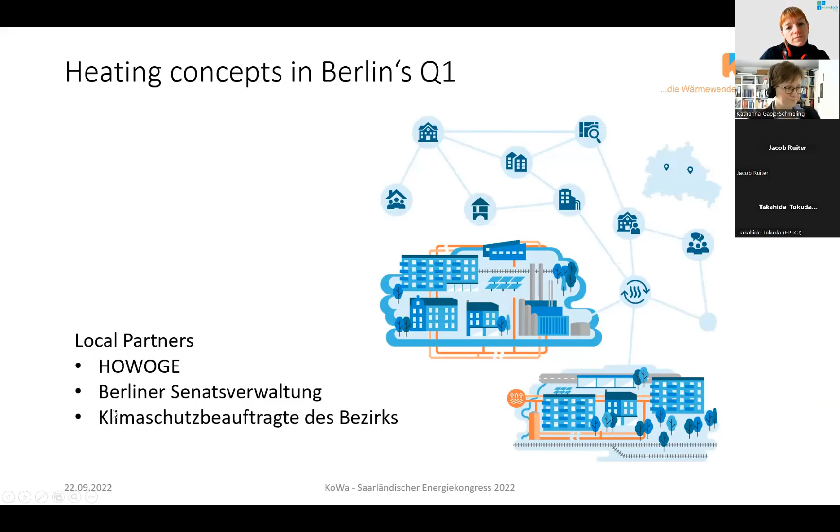I will briefly have a look at another study area. It's in the middle of Berlin. Our local partners were the HOWOGE. HOWOGE is a local, quite large company for renting apartments. They're state-owned, so it's not a private company. And the municipal actors were our local partners.

What we calculated here in concept 1 is a solar thermal system with 1,300 square meters and a seasonal underground storage tank of 3,600 cubic meters. I hope you can see my mouse. The storage tank would be here. It's an underground storage tank. Nevertheless, it would be above the usual level, about 1 to 2 meters. So if you look out your window, if you're living in the first apartment, first floor, and you look out your window, you will see that tank.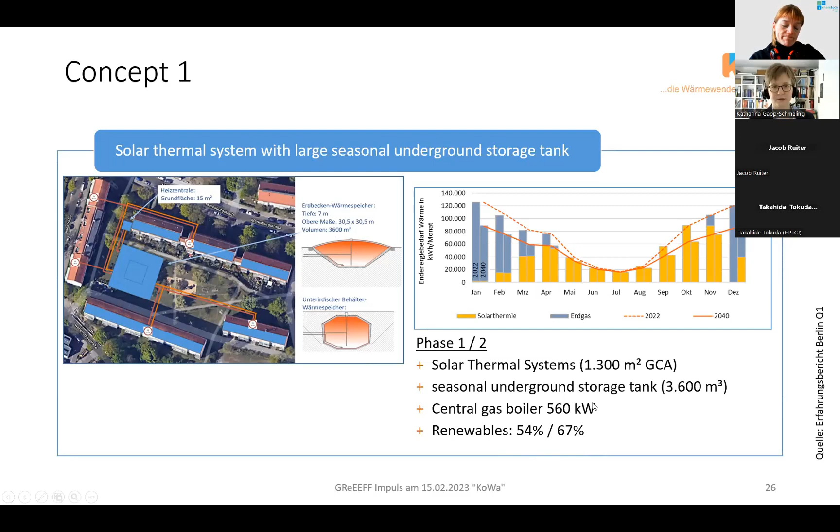And that was actually the reason why the HOWOGE didn't choose this concept, even though it's a good storage concept. If we store the solar power, the solar thermal power, then after refurbishing and improving the energy efficiency with the storage tank, you could have a renewable share of 67% to heat 150 apartments.

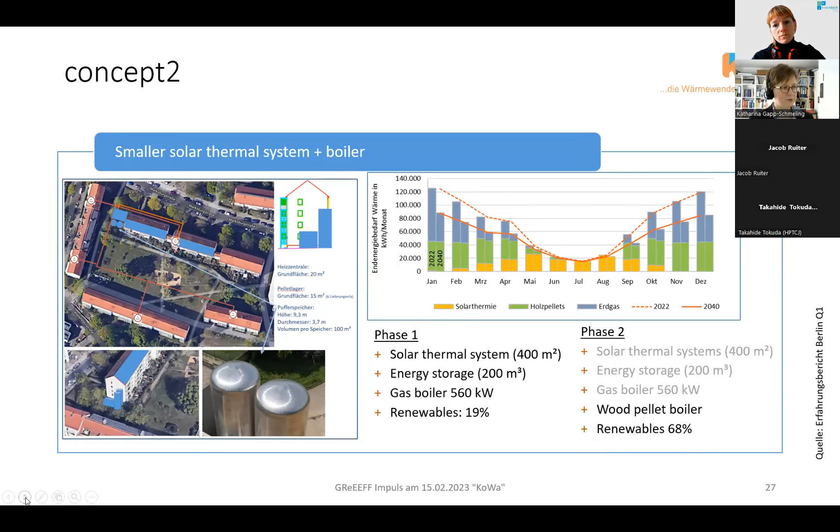Concept 2, a smaller energy storage, only 200 cubic meters. And you see, we would need an additional wood pellet boiler, and only with the additional wood pellet boiler would we come to a similar share of renewables. Last but not least, what's actually been chosen is concept 3. And even though we calculated for an energy storage, the HOWOGE didn't pick the storage. So they picked the concept without the storage.

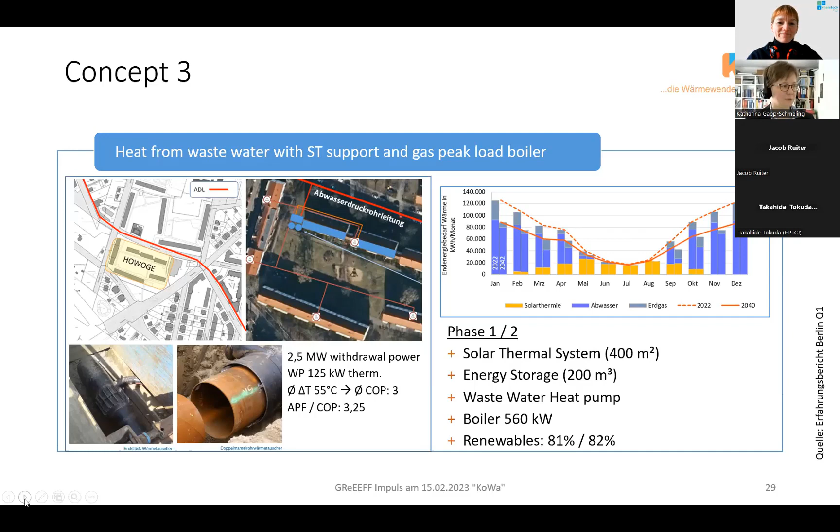What they're going to do this year, they're already looking for a company to build it, is a heating grid, and they're using waste heat. So here's a wastewater pipe, and Berlin citizens like to take a hot shower. So this one over here has 15 to 20 degrees. And this is a good heat source for a heat pump to then have a high temperature heat pump to heat the building. What we can see here, actually...

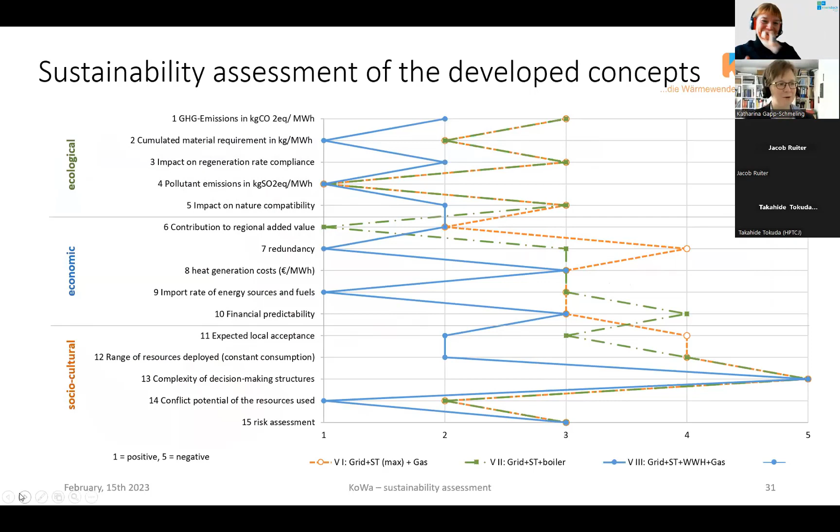Concept 3 has a lot of strength, even though it doesn't have an energy storage. So please don't think my conclusion is we don't need an energy storage. I think we do. However, what you see is that you have to look at the particular project to decide if you need an energy storage and which one you need. So thank you, and I'm open for questions.

Thank you very much. And yeah, I think you're absolutely right. Just because most of us are working on energy storage, it doesn't mean it's always the best solution, even if the heart is on the science and whatever, but it always has to be the one which is the best of all the aspects. So many thanks for your work.

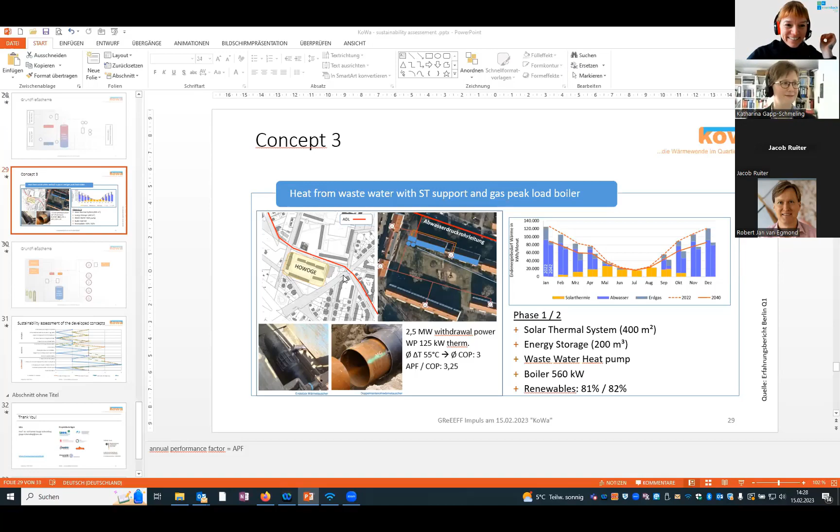Okay, so many thanks. I will take one question from the chat now, maybe a follow-up question to you, Katharina. It's asked, why have the pellets been considered totally renewable?

In the sustainability assessment, we said if you use pellets and they are certified from a regional supplier and to be renewable, then that is possible. We discussed that with Bernhard Wern, who is our expert on forests at IZES.

Around Berlin there's Brandenburg, and we have a lot of forests there. At that time in Brandenburg we had the problem that we had too much waste wood. So if I leave that wood in the forest, I have a huge problem because it will not bind carbon dioxide, it will just catch a wildfire in the summer.

We had that problem last year in summer because the administration wasn't quick enough to pull the waste wood out of the forest. Two train stations away, a city called Beelitz, they had to close the railways, close the city, and evacuate people due to the wildfires.